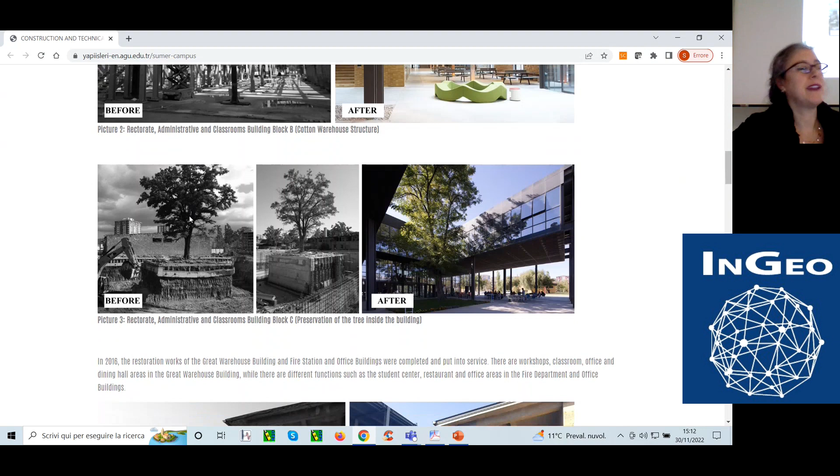Here you can see our building within the main campus. It's a good place, and I would like to share the main building as it was before, and then after renovation we have some places especially for students or for the people who would like to be there. We are preserving some special trees in order to have this structure. And we have also kept some of the previous warehouses, and we now have classroom buildings inside, the offices, etc.

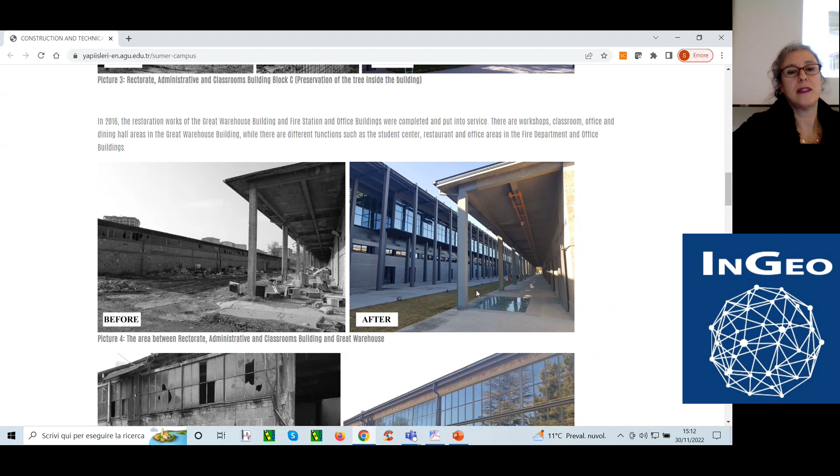And here you can see the renovated part of the facades. Before and after, now we are reusing, and there's a sustainable version of our campus, with some office buildings renovated in that region, and we are still using this as an office, for instance. And we have newly constructed some buildings like fitness centers and some laboratory buildings. And as you can see, nowadays we are dealing with this factory. This is the main factory building, and now they are covering the columns with some geotextile material in order to reinforce the structure.

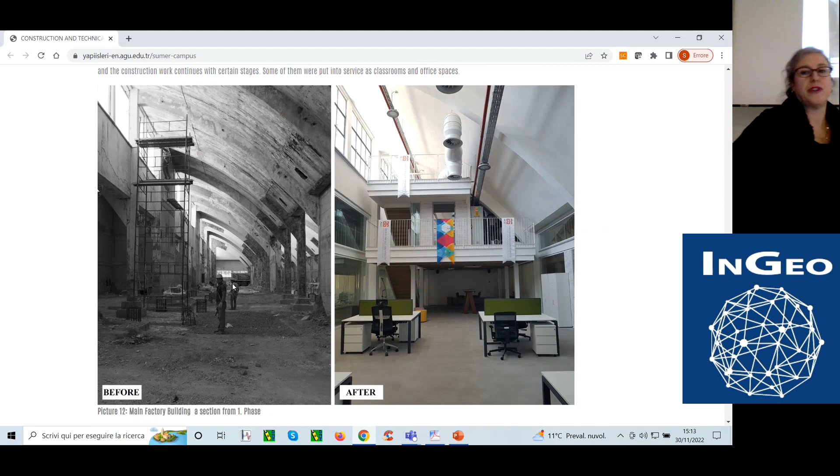Maybe we should say that. So after giving this information, I have to return to my presentation. Hopefully I can reach my page.

So with the numbers, in general, we have a limited number, which is called kind of a boutique university. I don't know how many staff or faculty members you have, but it's a very limited one. And we have 20 programs with 5 faculties, including 100% English taught courses. And you can see different nationalities. We even have some from Italy on our campus. And here you can see our departments, the departments that we have so far. We are not planning to open any medicine or medical faculties. Depending on the technical issue, we are all focusing on that.

In our civil engineering department, we have limited staff, and we don't have a master program. We have a different master program, Sustainable Urban Infrastructure Engineering, which combines urban planners and other disciplines in order to have a program. There are some similar examples in the UK. And here you can see the other programs that we have.

So this is the short video of our campus, and there are additional ones. Probably they will continue, but okay.

Afterwards, I would like to give information again related to our department before we start our case. I don't know if I need to share or do something.

In our campus, as I've told you, we are 100% English education. For our civil engineering program, we have a 3.5-year program. After 1 semester, they have workplace experience, going to the firm and having their internship at that stage. I don't know how it works in your departments, but it's a different stage because interns can get a job after finishing their internship. So that's a good opportunity for them.

What else do we have? We are actually considering applied education. We are focusing on 'you should play and learn.' How can you do that? By making some models or having special apparatus in order for you to make your models. We are really considering that.

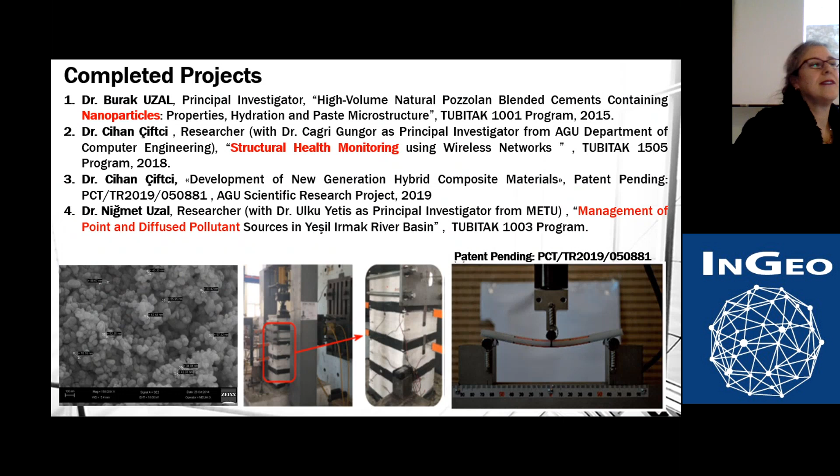Here you can see some examples of completed projects, but I forgot to update some of it. For structural health monitoring or material science, you can find different options and projects that we have already completed. I was also involved in a project related to the economic effects of natural hazards, with the Disaster and Emergency Management Authority. I completed that, but it's another area that maybe we should also discuss.

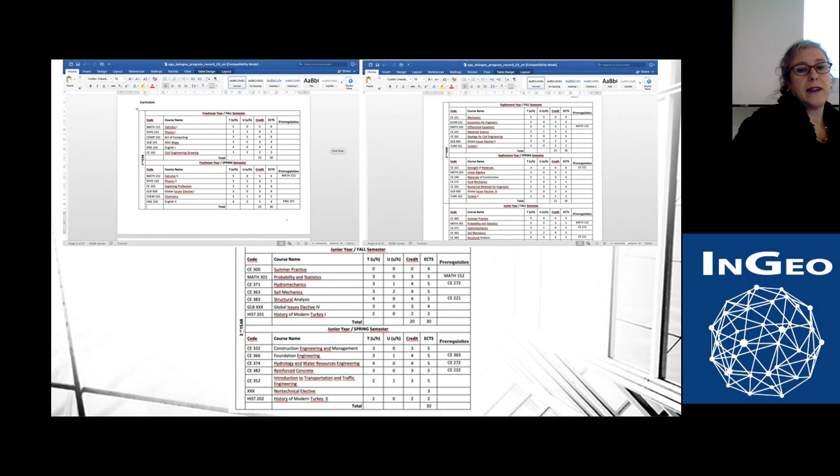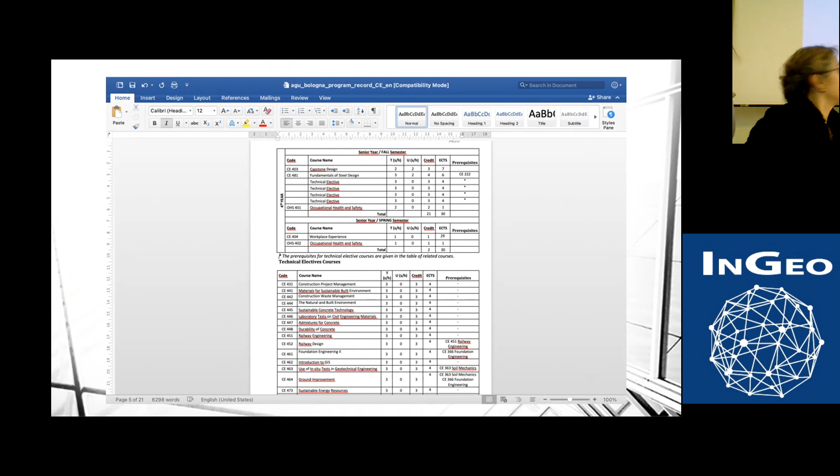For our case, we have some undergrad courses. If you are interested, I can give more details. There are some options, especially for the technical courses. For the Sustainable Urban Infrastructure program, I can give brief information again after the presentation. Thank you for listening to me about our university and our department.

So if you wish, if you are ready, we can start with the liquefaction part.

I don't know if it will work or if they can see the presentation. I don't know what happened with the connection to the screen. So the third one, I can close this. Okay, I now hope it's working. Really, if you want me to put it again... Okay, so now I have the laser. Yeah, you have the laser.

I would like to give brief information about liquefaction. You have already learned and been taught about liquefaction, but during this presentation, I'd like to make you aware of exactly what we've done so far, and what we should do. Maybe we can focus on that, or you will have some questions. At the end, I have some ideas because we can find some projects or things to establish during that period, since many things were actually performed during that stage.

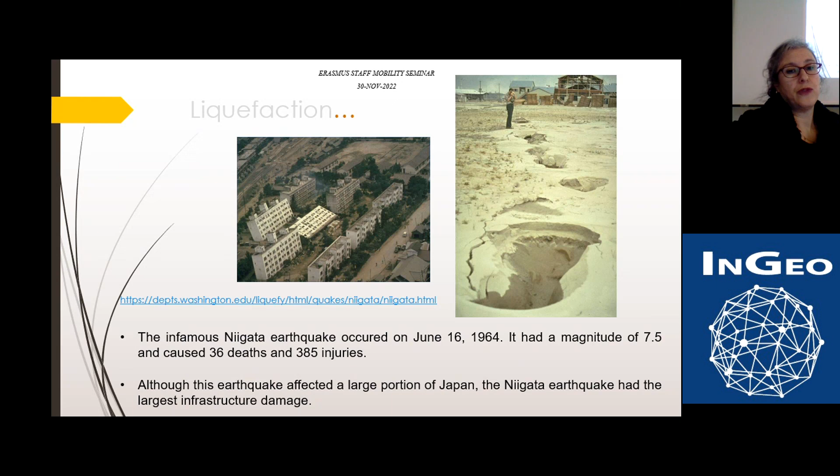In general, I have tried to find a definition for liquefaction. It's really hard to find, but I have taken this directly from a web page, including what happens if it behaves like a liquid. We are all learning like that.

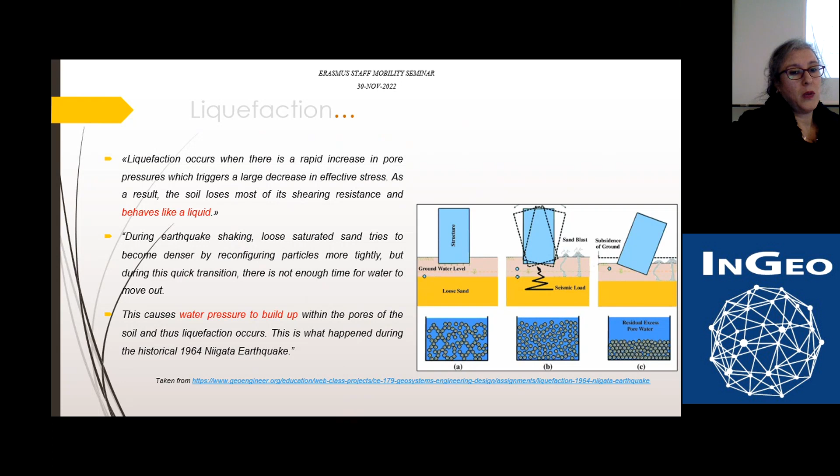So you can have earthquake shaking within loose material, and then, within the reconfiguration of the particles, there will be a quick behavior we have to also consider. Do you have enough time to move the water from the system? We don't actually know, even though we have some observations.

So what is liquefaction, or when does it occur? Depending again on the earthquake shaking, it can cause the pore pressure level to change. You'll be having increments, especially.

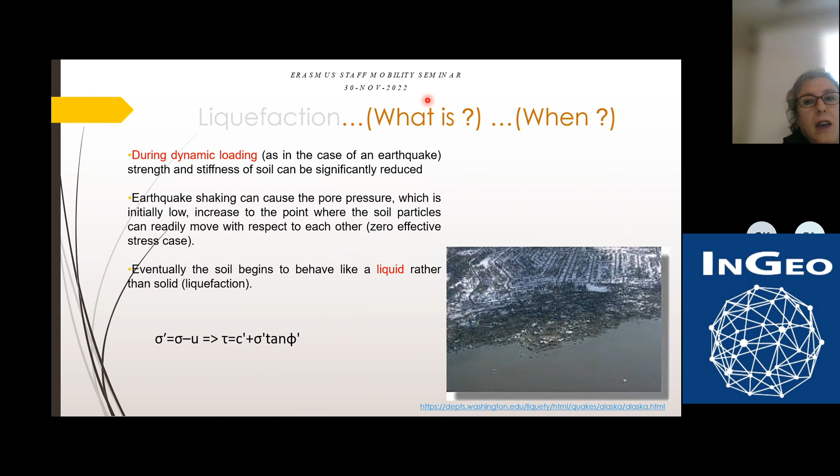As we all know, eventually the soil begins to behave like a liquid rather than a solid. This is the behavior we are having. So where exactly it occurs depends especially on the shaking activity.

You can have blasting instead of an earthquake event. There would be some increment in water pressure from construction-related activities like blasting, which can increase the water pressure in that sense. Kramer also mentioned that if you have a saturated sandy layer under loose soil conditions, you can have liquefaction with a magnitude greater than 5.0. This is another thing we need to consider.

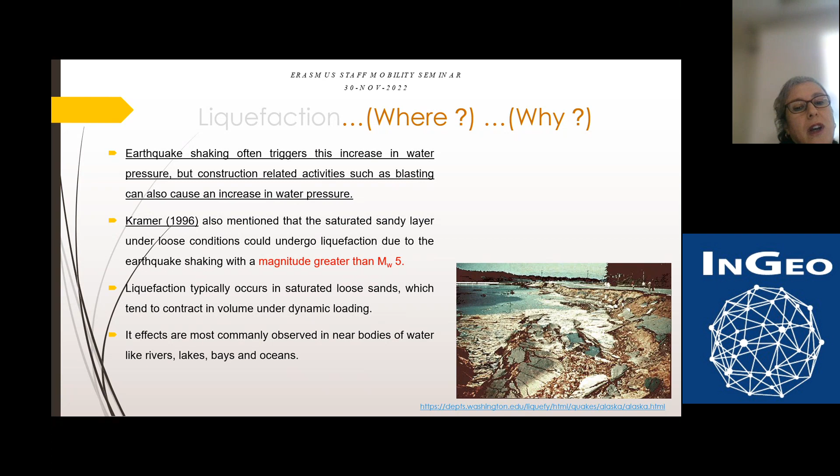It typically occurs in saturated loose sands under dynamic loading, and it especially affects river areas or lakes and other bodies close to water regions. How it occurs depends on the structure - if loosely packed, it moves toward a denser configuration.

One of our professors was saying that for materials like concrete or steel, there are some standards you can apply. But for soil, this is impossible because it gets very complicated, and it is case-study based events that you have to deal with.

During an earthquake, what happens is there isn't enough time for water in the pores of the soil to be squeezed out, and some gets trapped, preventing the soil particles from moving closer together. This means there's an increment in water pressure in the system, leading to softening and weakening of the soil deposit behavior.

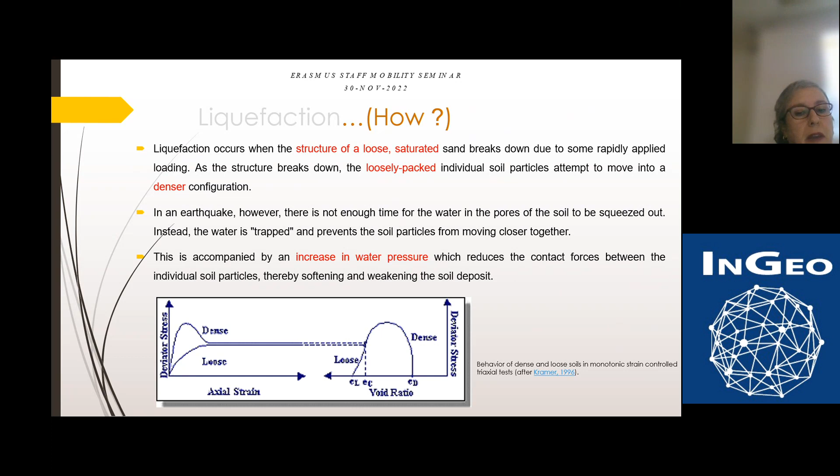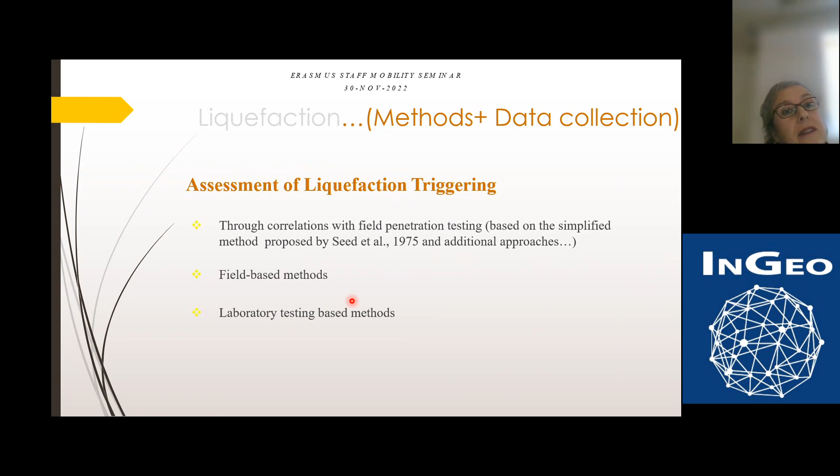Afterwards, what methods do we use or how do we collect data for the assessment of liquefaction triggering? There are lots of publications you can find depending on field penetration testing, other field-based methods, or even laboratory testing methods. I'm going to give some examples and try to emphasize the importance of liquefaction.

Here you can see the typical approach we use, some empirical analysis. You can have a liquefiable layer, and borehole logs with SPT, standard penetration test application, or you can have CPT. As far as I can tell from Professor Amoroso, there are new techniques being used in Italy. But in general, the basic trend, and the economical one, is using SPT all the time.

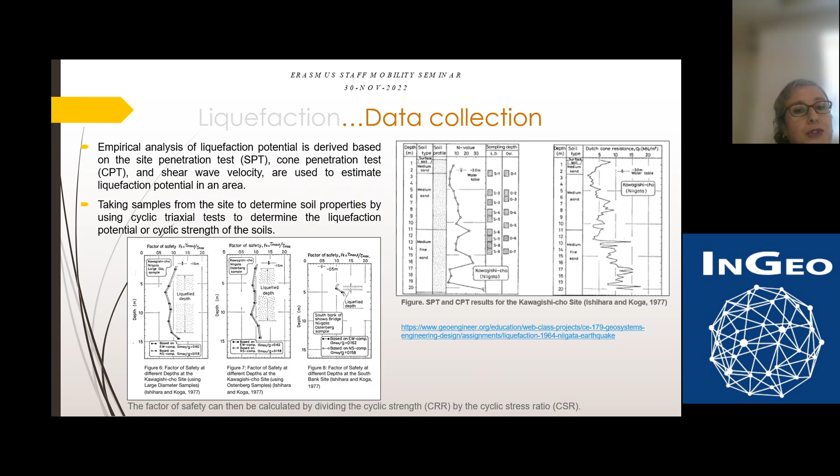I don't know if you are also allowing all the companies to apply SPT at this stage. But there are lots of correlations, and you need to also consider different items that I'm going to show you. So this is the main approach for us.

What else do we have? Within field penetration testing, we need to look for the factor of safety. We have cyclic resistance ratio and cyclic stress ratio, as you know. We obtain them with different parameters and factors in order to reduce, increase, or change the level for all the soils so far. At the beginning, we started with SPT or other tests for the cyclic resistance ratio. The cyclic stress ratio represents the liquefaction demand imposed by the earthquake.

When we correct and get the factor of safety result, it depends on the magnitude scaling factor, or you may have additional corrections needed for fine content. There was a Chinese criteria, as you all remember, but it is useless right now. So there are lots of updates depending on fine content.

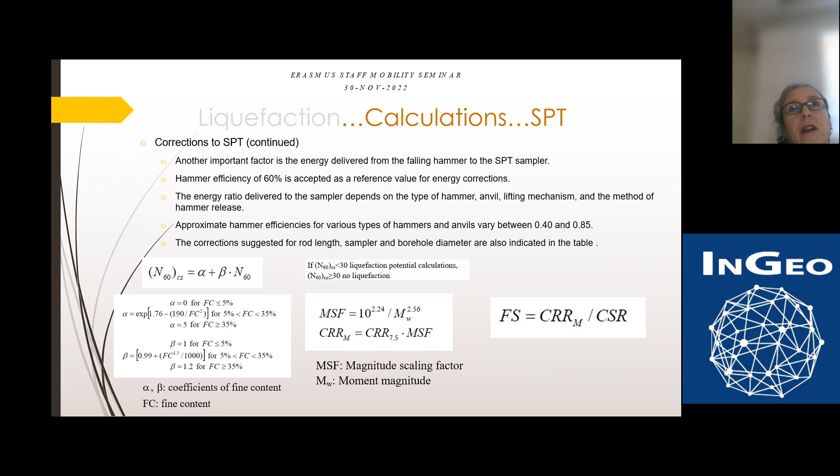As far as I heard from Çetin and Bilge just recently, they're assuming that the correlation we have, for instance for CRR, should be updated. We consider taking that correlation and applying the correction. They're also thinking about the energy ratio of the SPT.

So there are some unknowns, and we still need to find the corrections or applications for the formula. Because in Italy, what percentage of energy ratio are you using for SPT? Is it 60?

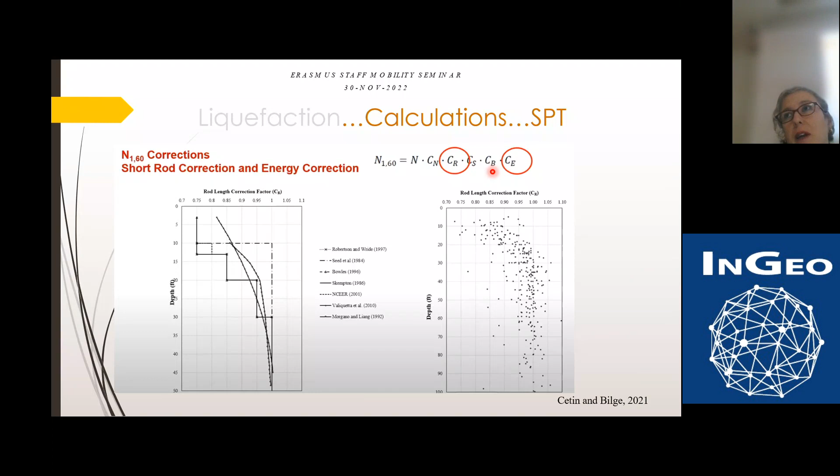You check at the beginning when you buy the machine, but then it's always the same number, and probably it should be checked. There are apparatus in order to measure the energy correction, so it's necessary to apply that instead of just assuming the value.

So for SPT, again, you can find many correction factors related to fine content. There are applicable ranges with different procedures and empirical formulas. And it continues, because we have an overburden correction factor, and you can even add a sloping ground correction factor. If it's a sloping area, you have to consider an additional correction.

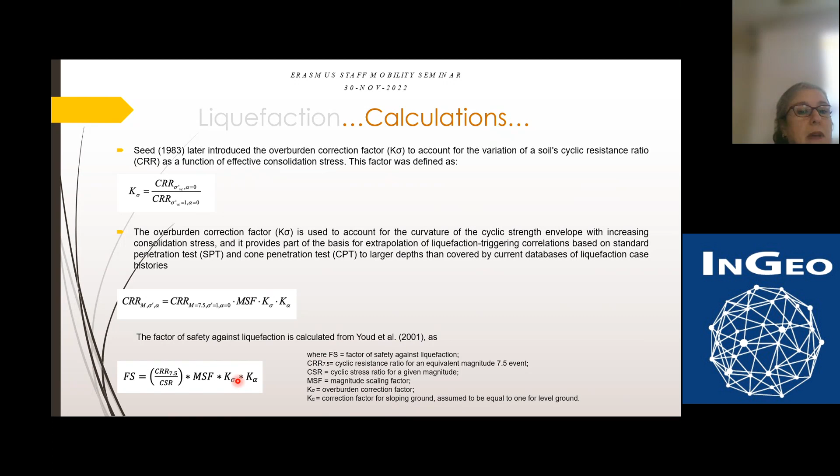It looks like things get complicated with SPT-based or even CPT-based approaches. I recently looked at a CPT study you're all familiar with, cone penetration testing. They performed it within a critical layer related to gravelly soils. So this brings to mind that with gravelly soils, you're dealing with CPT applications in order to get the liquefaction analysis, etc.

It's a kind of approach from New Zealand. And I have also come across DPT for the Ecuador, I don't know how familiar you are with it. It is called the Chinese Dynamic Penetration Test. They have also compared it, again, in gravelly soil in order to get some results for the liquefiable layer for the critical area. So there are still ongoing projects and maybe new updates for the applications.

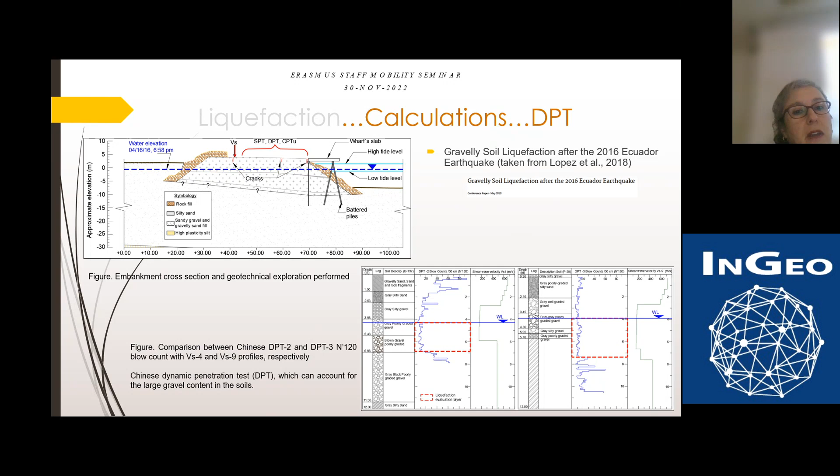And when we come to the shear wave velocity approach, there is especially the famous one, Andrus and Stokoe, that we are using a lot. But there are some, again, gaps or some new updates that I have to mention, and I'm going to show some figures and some recent references. And with the SPT data, you can have it from different areas. When you look at the different states and different years, we are actually having more data. That means that you can be on the safe side and you can be sure in order to study.

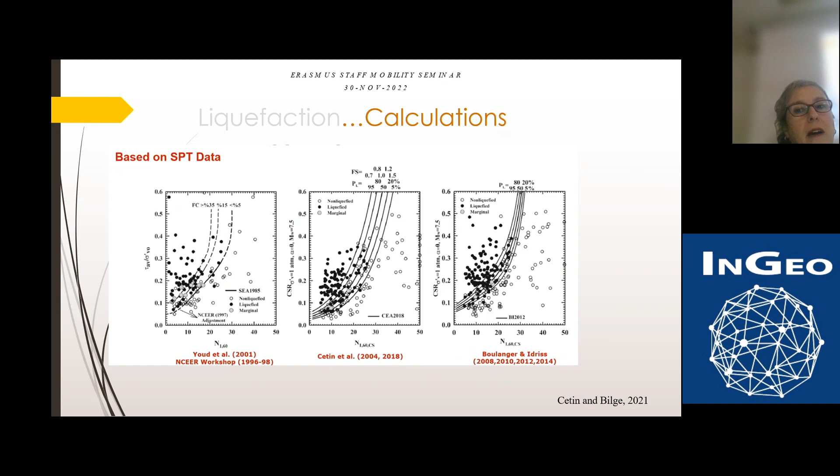But how about CPT, for instance? Again, it is valid. You can have a different approach with Idriss and Boulanger, for instance. They are increasing the database again, and then having different curves in order to be sure which would be the liquefied and non-liquefied sites. But somehow there are some researchers who could not update themselves or could not use the recent version of the methodologies. Maybe they are losing themselves inside the research or other things. So this is another critical issue. We need to clarify all of the items.

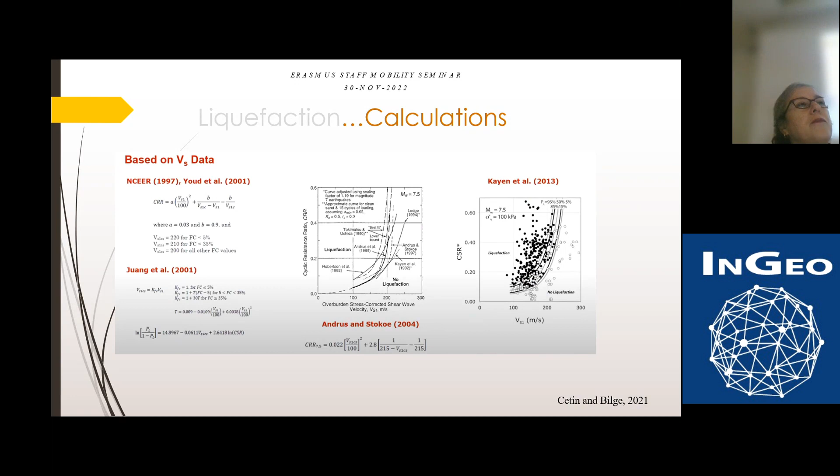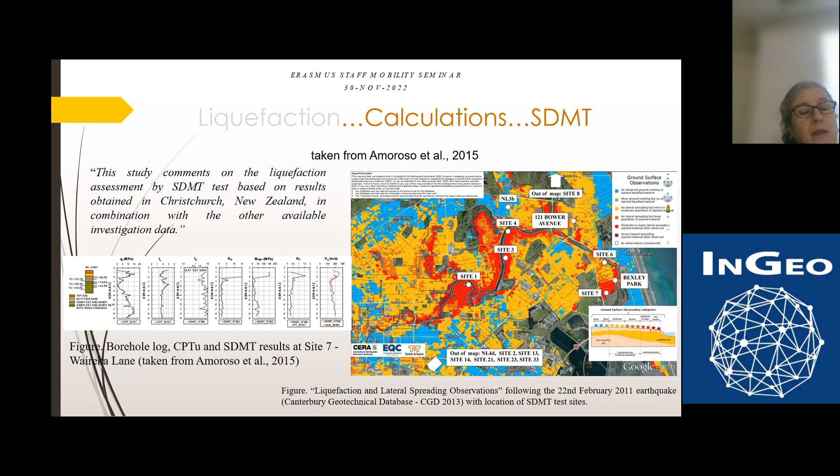And for the VS calculations, as I mentioned, we have Andrus and Stokoe, it's very famous, and there's a new study with Kayen, which is also related to the shear wave velocity, depending on the different cases. So if you have the data, you can even try, or you can compare with SPT, VS, or CPT, etc. But when I arrived, we talked a lot with Professor Amoroso about SDMT; there are still works ongoing at that stage, and it is really worthy to work on it. There will also be some comparison between the CPT and SDMT, and she showed me and shared with me some of the important items. This is also an important and critical thing for the liquefaction behavior and for obtaining and updating the cases, I should say. These are the calculations part, but how about databases?

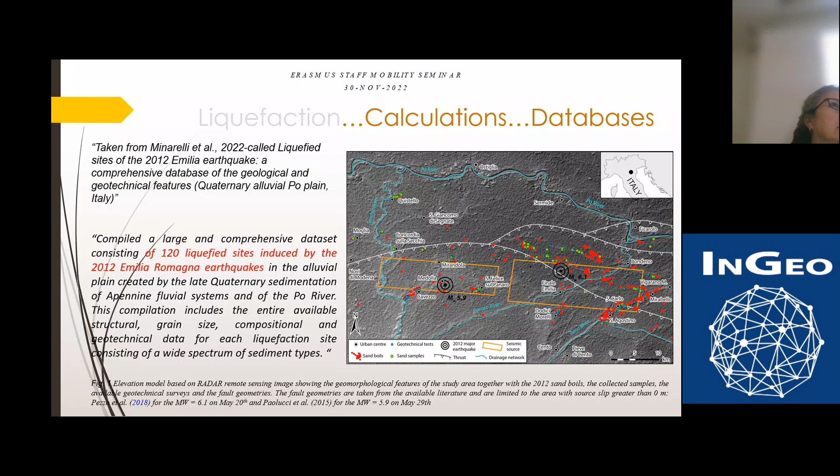For instance, I would like to share a database from Italy. They have 120 cases, or even some special cases that they are collecting as sand boils or lateral spreading or liquefaction behavior. But when we think about the worldwide stage, that means that you also need to criticize the effect of the database that we have. Nowadays, maybe you heard about the next generation attenuation models; there's also a new generation of databases, the next generation liquefaction database. I have searched a lot, but there is still some missing data that you need to update for all over the world. And in some sense, the data expansion depends on the quality of the data. Another issue that you need to consider.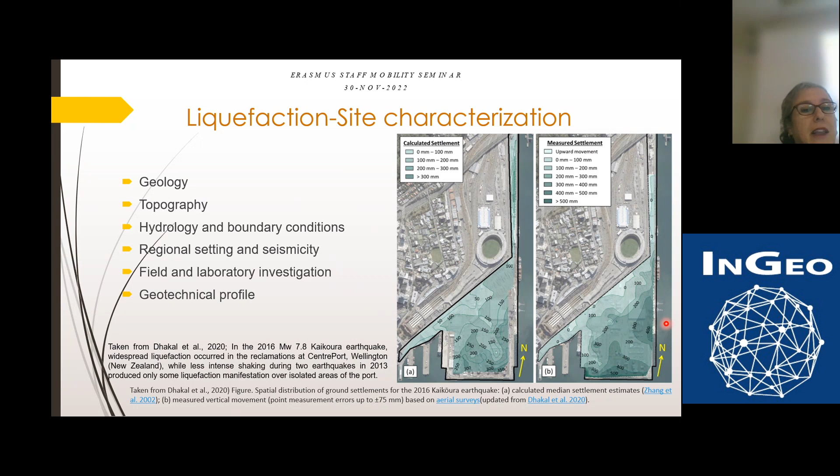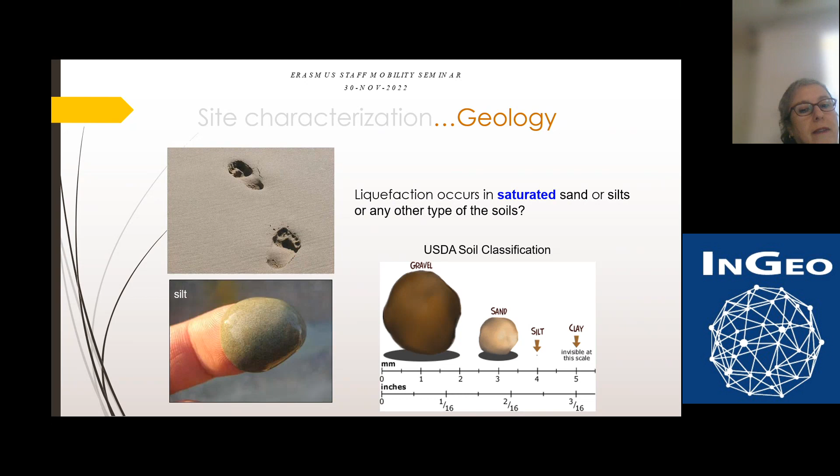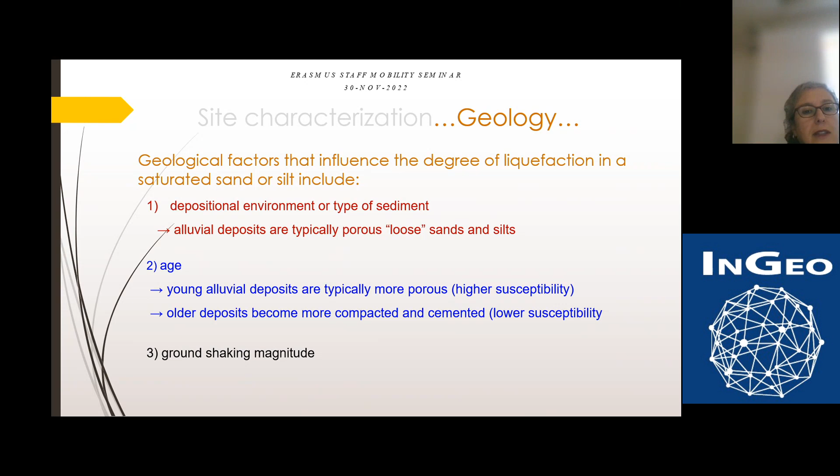So what else for the geology? When we return to our case, we all know about sand or some silt, but how about clay material or gravelly material? There are still some unknowns, and there are still works ongoing at that stage. With the factors, we also need to consider the depositional environment, or even age, or the magnitude. So we have to divide, or maybe we have to look for some special parameters in order to connect the database. So here you can see the effect of the geology, related to the behavior that may occur after liquefaction, or even in these areas.

Or you can see the structural behavior, but the foundation, because of the liquefaction, may cause the problem for your case. So for the geology, especially geological structures and faults, type of the sediment, we have to also go deep inside the area, because age of sediments would be also critical for us. I don't know how the scale effect would be effective. We need to have a local scale, or we need to make it bigger. So we have to be sure again.

And of course, degree of consolidation, depending on the clay material you have, or past stress history, how we can measure or how we can understand that. So we need to have some geotechnical profile or site investigation models in general, and of course 3D ones right now. So as you can see, some alluvial material here you can have. And what else?

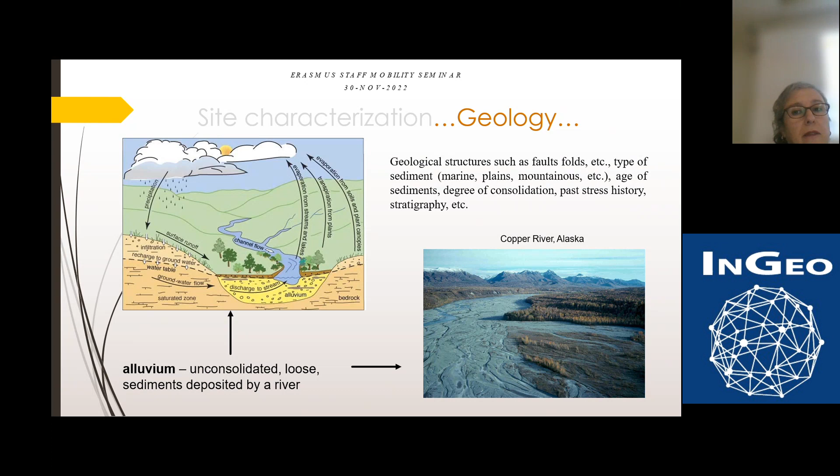Amplification. So do we need to consider both amplification and liquefaction at the same time? Yeah, maybe. But we should also work and think about it, because it's also related with the topographic activity. We should also consider that. I would like to emphasize.

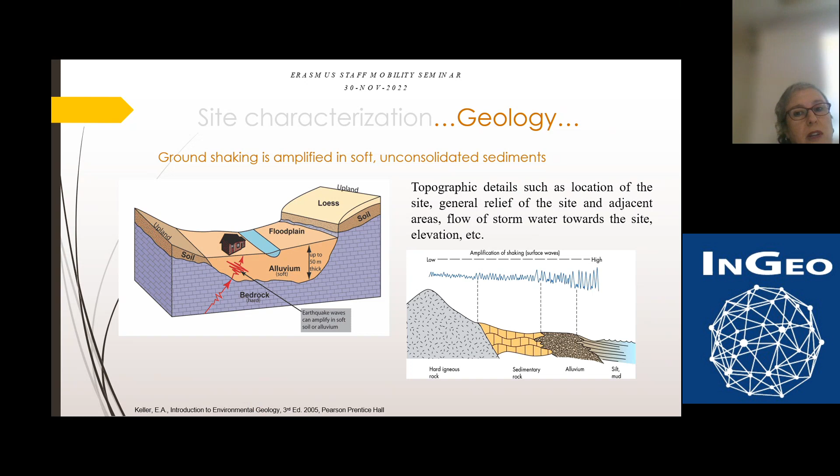Besides, there are some hydrological conditions. So how we can measure the depth of the groundwater table, or how can we be sure that the depth is the exact depth for our analysis? We are assuming some kind of behavior that occurs in the actual soil type. So it depends on the rains or drainage pattern, etc. So you need to have a whole model, including maybe an interdisciplinary approach.

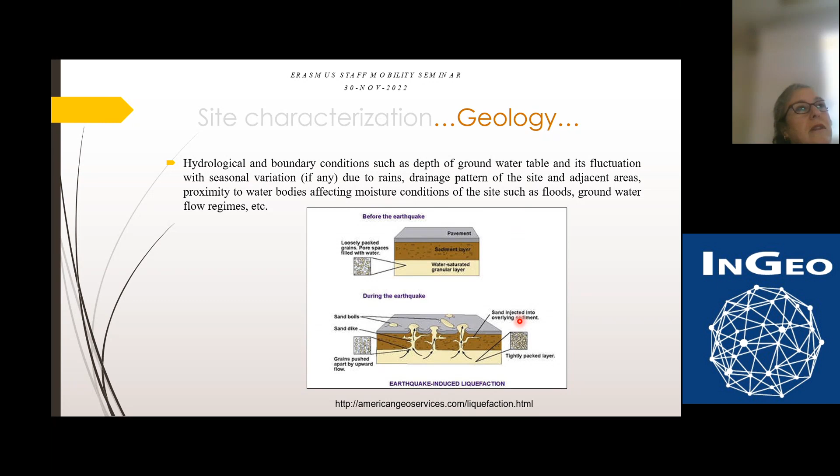And when we consider the effect, especially in the moisture conditions, like flooding or groundwater flow regime, you will be facing maybe liquefaction behavior that may occur frequently. I have a study that I would like to emphasize that occurred in Washington State with a very low seismic activity, but there is lots of liquefaction behavior observed within this range. So we have to consider again the magnitude, or which magnitude levels we can have, which amount of accumulation or liquefaction we can have.

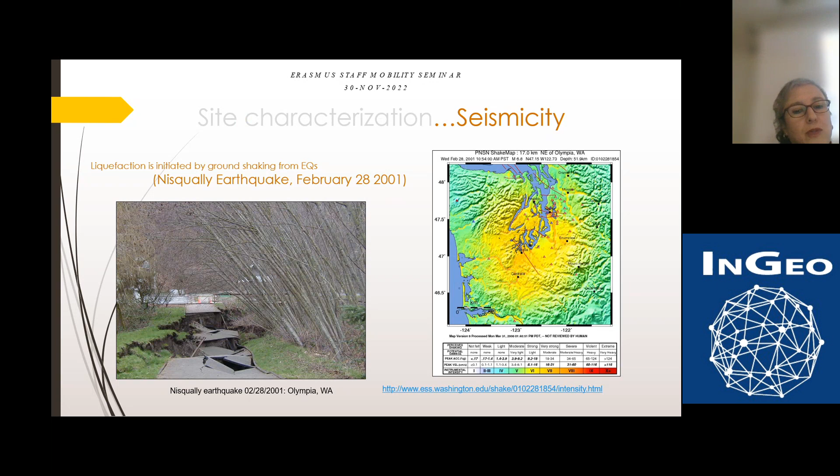Another point that I have to give information on. So for the seismicity, again, we have some potential. It's a nice figure, including all of the items, but we need to also deal with the below layers that we are having, how we can be sure that there will be a boundary between the layers, depending on the fault activity or some past earthquake or tsunami history, etc. So a kind of site-specific seismic hazard analysis should be done for the relation of the parameters and the performance. Sorry. I hope I don't bore you, but yeah, it's a long topic.

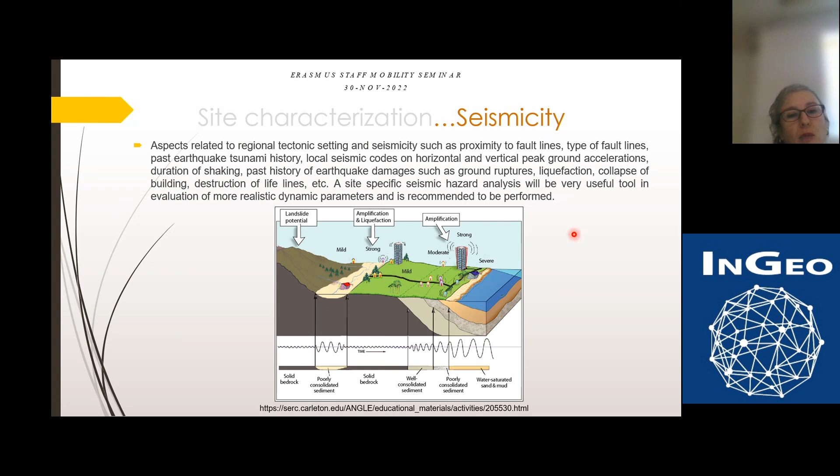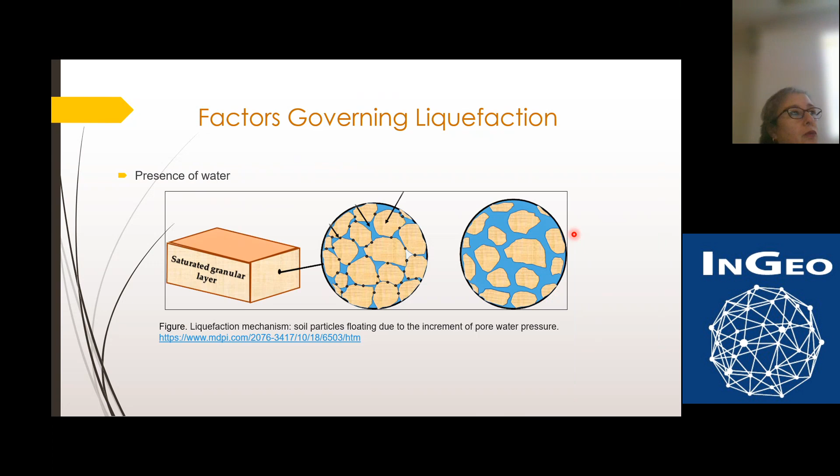So if we find the parameters, I can add additional ones like the factors. Can I add, instead of magnitude, intensity or duration of the earthquake? Yeah, there might be possibilities. So it also affects the liquefaction behavior. Again, it's related with the groundwater, and the other things are also similar. But besides, we should also have the in situ confining pressure around the material. These are what we should consider, especially intensity and duration. We have to make somehow correlations between them, maybe. Or like the presence of water that I am repeating. So how can we do that?

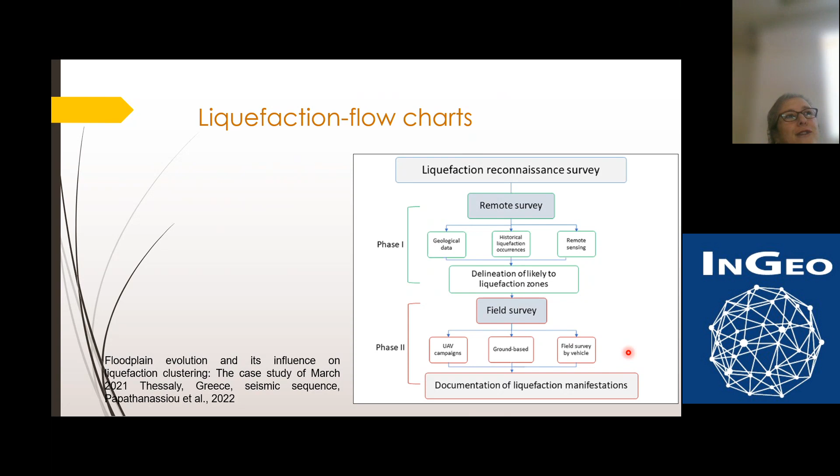I searched some of the approaches. There are some flow charts. You can take one of them, for instance. It's a very recent one. And they have two phases. They have the data they are collecting with the survey, then a field survey, and then some findings for liquefaction manifestations in the area. It's really hard to know how we can behave for a flow chart, or do we need to have our own for each country or for each area? We should be sure. And what else?

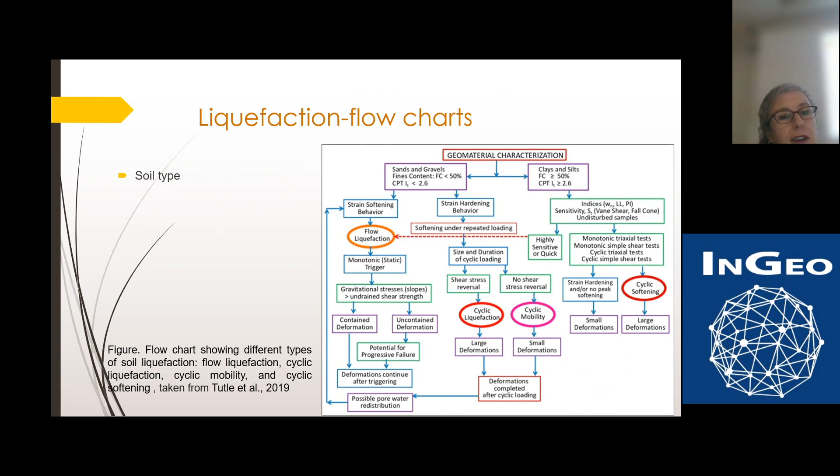So until that stage, I have tried to figure out and then give some questions or just brainstorming for the liquefaction part. If you are not getting bored, I'm going to continue with the post-liquefaction part. Or if you don't have any questions.

No, it is fine. Sorry, my voice is maybe sometimes unstable because of talking. Yeah.

Yeah, actually, I heard from their approach, especially depending on the methodology that they are working on probably. Okay. Yeah. So we need to be updated all the time, and then it's really hard while you are doing your work. Big change. Big change. Yeah. So important, especially for the rod length also. It's also critical.

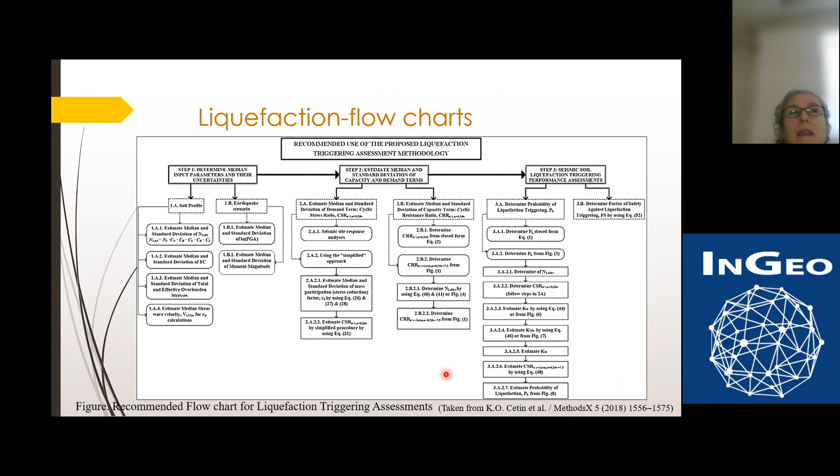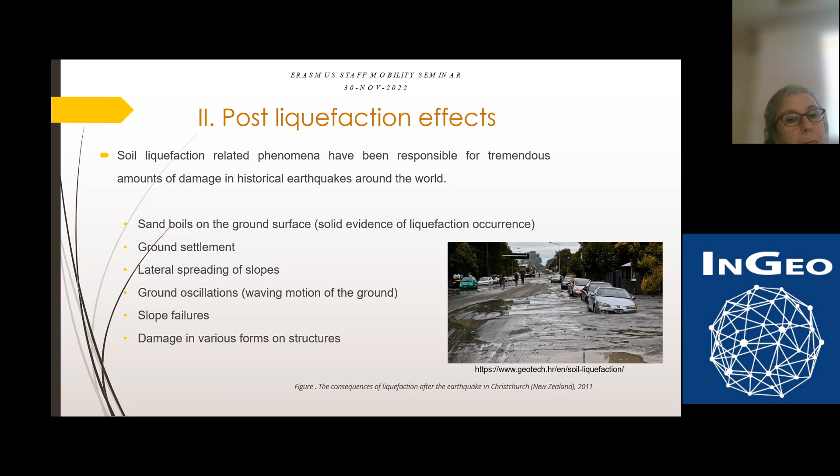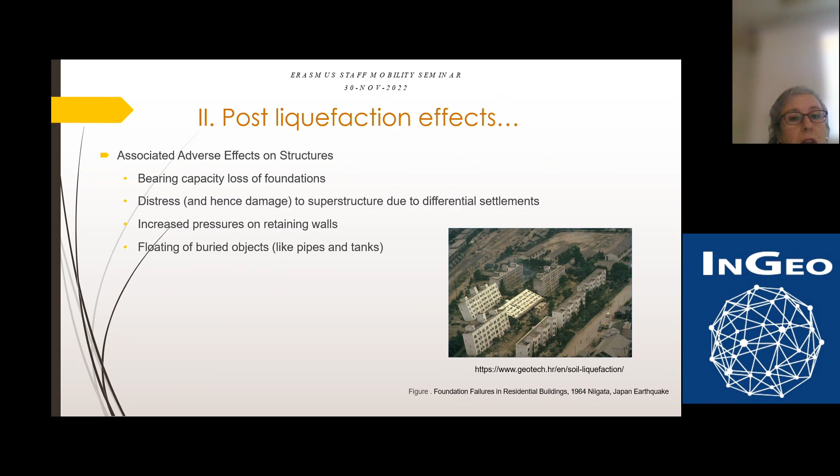So besides that, we can have some effects on the structures, like the bearing capacity loss, or some differential settlements, or some increments in the pressure of the retaining walls, or some buried objects floating, especially the pipelines, maybe the main problem that we can have because of the liquefaction failure. And I would like to share these foundation failures.

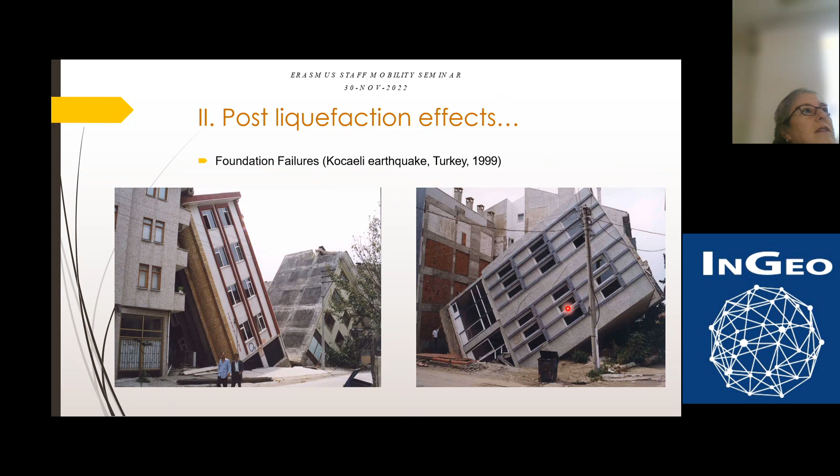They're all really famous after the 1999 Kocaeli earthquake, as you can see. The structures seem okay at that stage, but the liquefaction behavior, or even in here, as you can see, with a settlement of 35 centimeters or maybe more than that, they have had this problem. 1999 earthquake, as you can see. So these are the foundation failures.

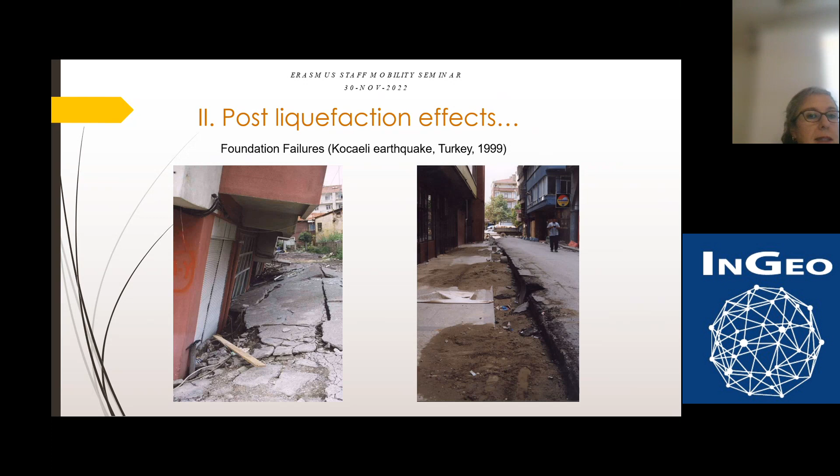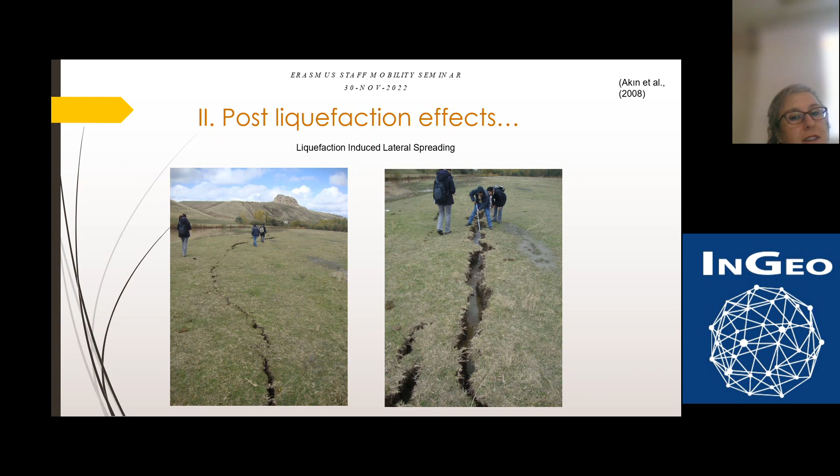There is some lateral spreading that you can observe, especially near the river, and then you need to also measure, and you need to go after the earthquake in order to get the data. But it's another thing that we need to consider.

Additionally, sand boilings. What would be the amount of the sand boilings, or what would be the radius, or the material that comes out? Also, we should add the cap soil behavior. You can have maybe unknown material that does not allow the material to go up. So we have to also study that.

And with the sand boilings, Christchurch is the typical one, and Professor Amoroso really worked there, as far as I can see, collecting and making lots of experiments. It's a nice laboratory in nature to have an idea, especially of the sand boiling material.

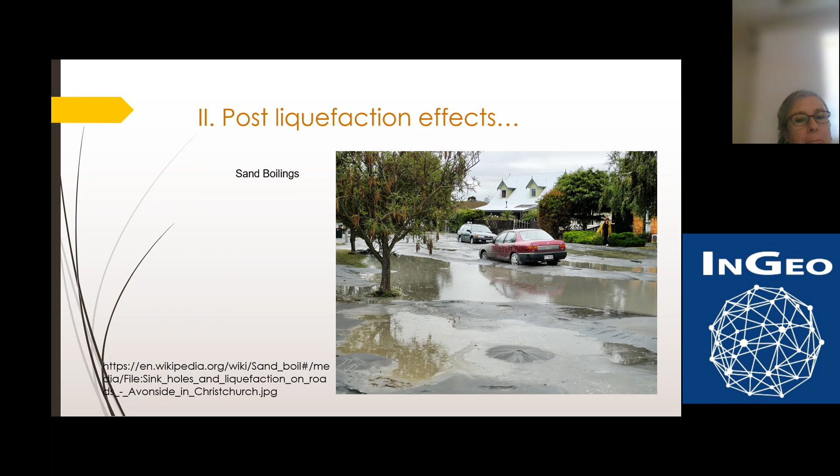Besides, as you can see, with the damage in the various structures, within Kobe or again Christchurch, and even some sinkholes that may occur, the whole amount of the material is related to the liquefaction behavior. Sorry, I couldn't give some of the important items because I have to keep them for tomorrow. Therefore, I need to just give the general idea.

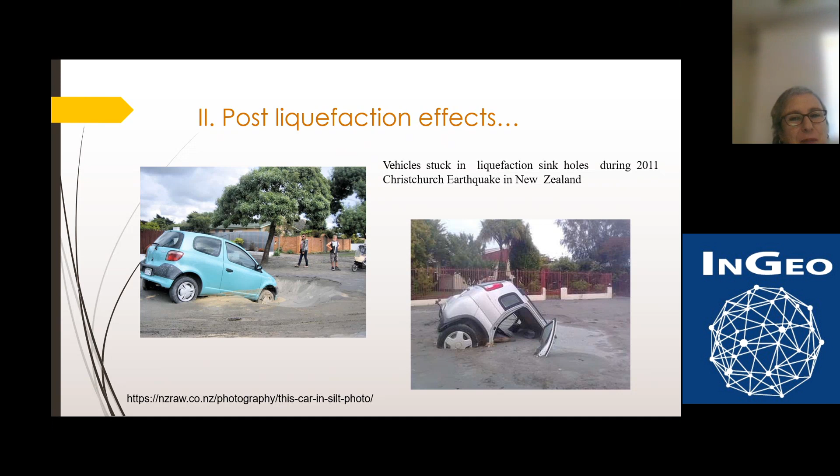While I am putting these examples, I realized that we are theoretically perfect. We can draw everything, but while we are having the experiment or the other things, it really changes. We cannot see the theoretical parts in the field.

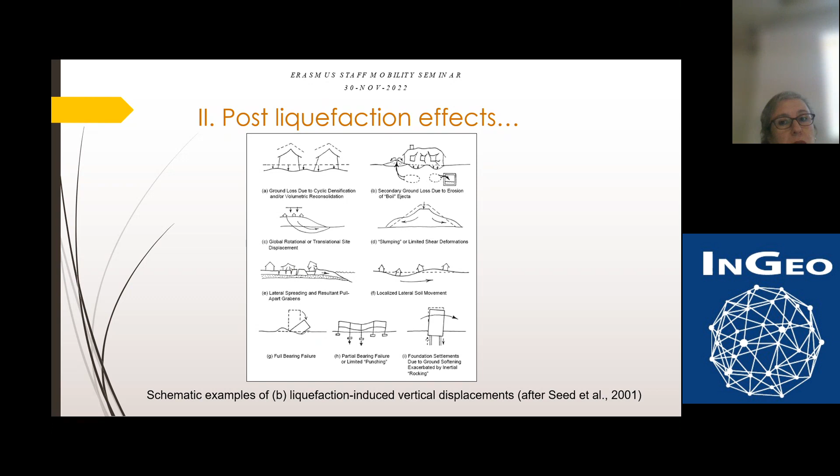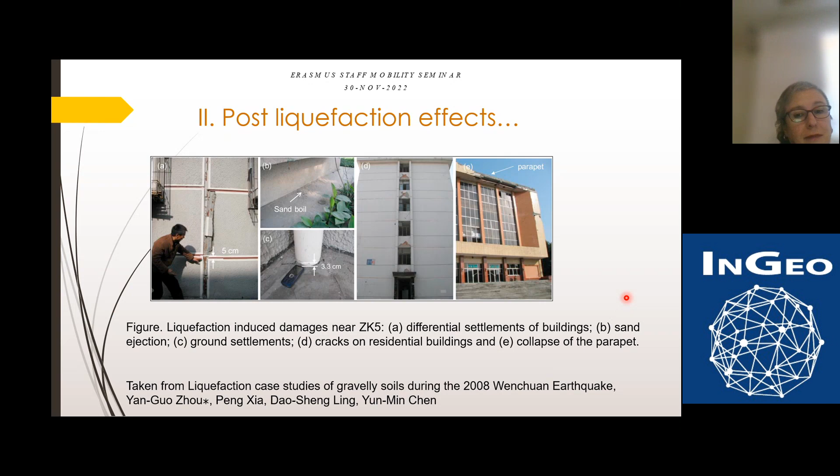And again with differential settlement, it is not catastrophic, but as you can see, there is some adjacent behavior in between the structures. You can observe the settlement or differential behavior that occurs in the structures.

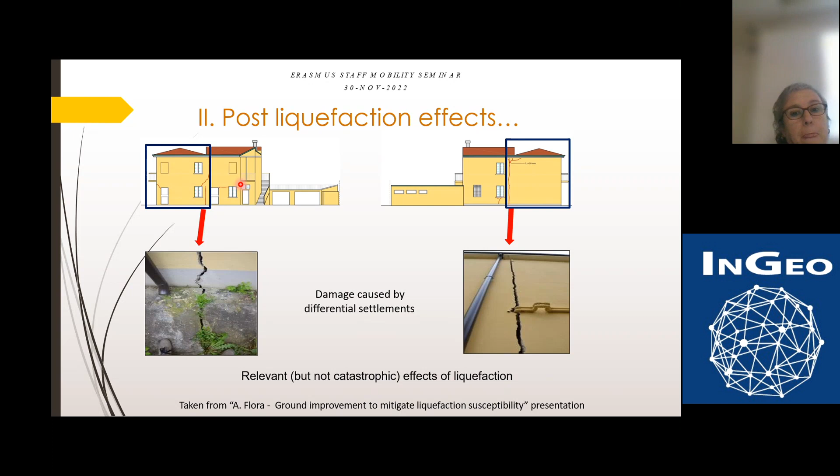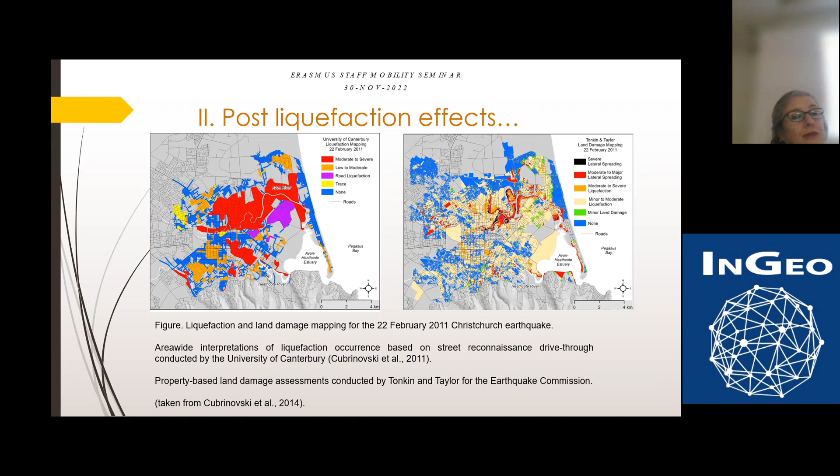What else? I should say, okay, there are some approaches. We are making some maps. So how can we decide the map is necessary, or what the scale of it would be, or we should be sure about the details. Here you can see from Cubrinovski, they have studied some places depending on liquefaction mapping, not the triggering, but you have to also consider the hazard index or the size of the liquefaction potential or severity. So it's another issue that I have to say.

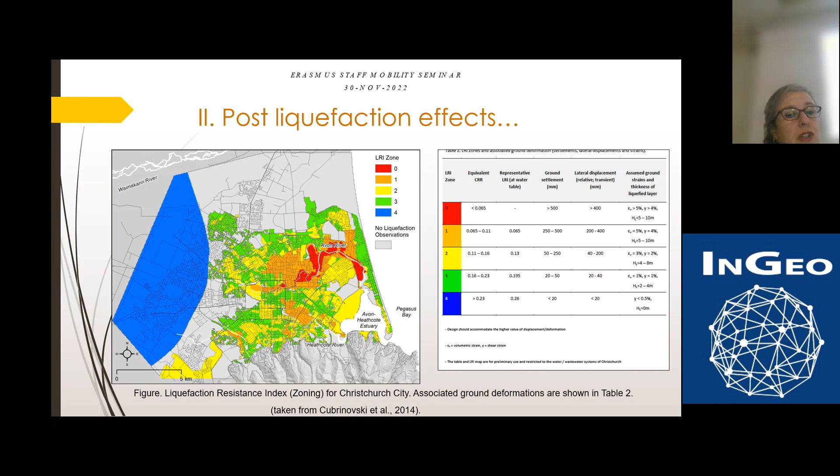It's a good example. So these are the effects that we have seen, but how can we solve it, or what are the methodologies? We have settlements. As you know, we have different approaches: Tokimatsu and Seed, Ishihara and Yoshimine, Shamoto, and additional databases, additional approaches that we are having. I have actually used some of them.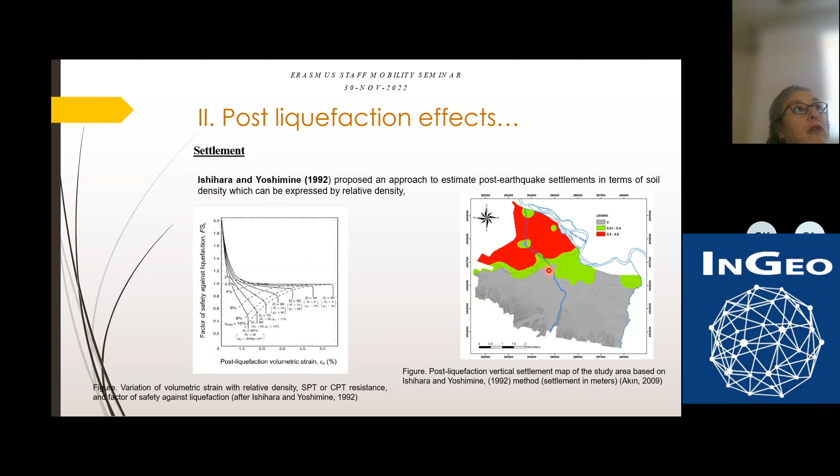By the way, I have studied seismic microzonation for a specific area. Tomorrow I'm going to talk about it a little bit. I have prepared the vertical settlement depending on different formulas. In one of them, here you can see the area, and the amount of settlement that may occur with the liquefaction. Or even with Shamoto, I have used some approach depending on the graphs, and with the other one.

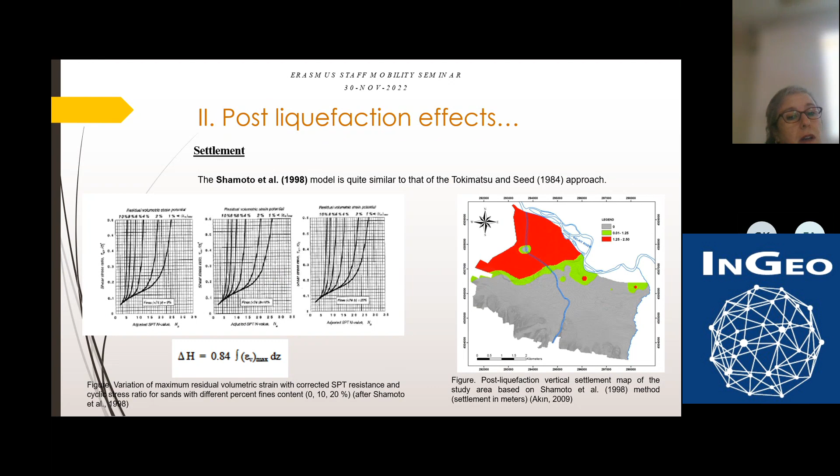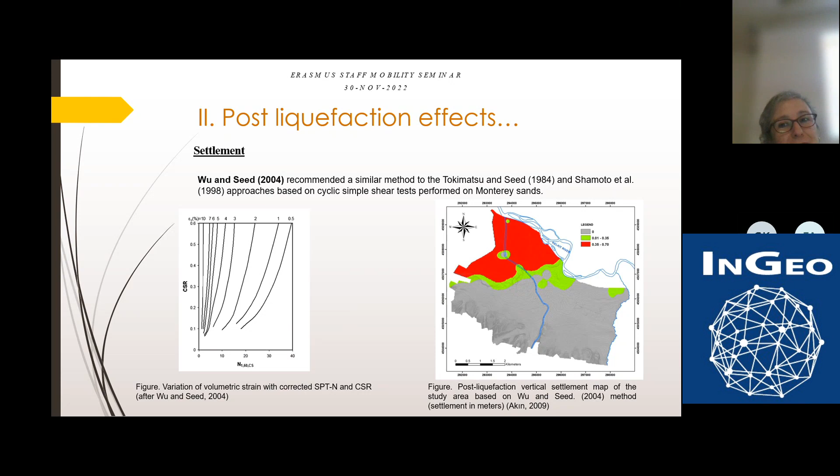And for the lateral spreading, how can we obtain the results, or which formulas should we use? In here, as you can see, some researchers use empirical models that deal with the lateral spreading behavior, and maybe we should somehow add sloping ground or the sloping amount for the lateral spreading, because we have corrections like K-alpha, as you remember, for SPT, but for liquefaction-induced ground deformation, we don't have any sloping behavior taken into consideration, as far as I can understand.

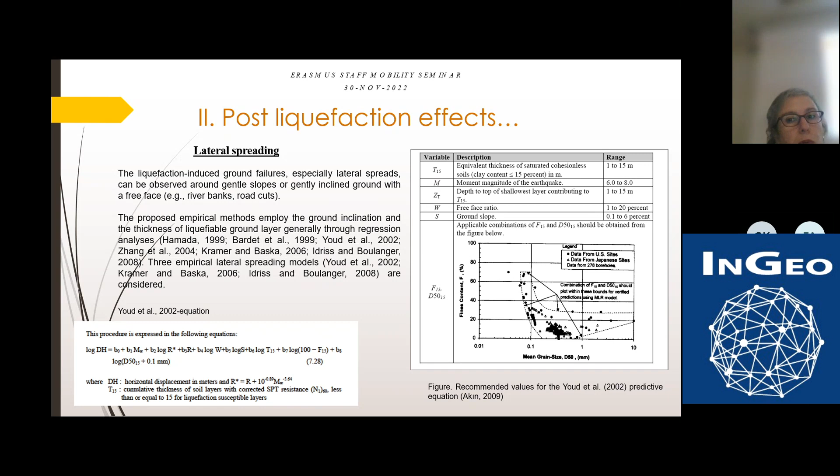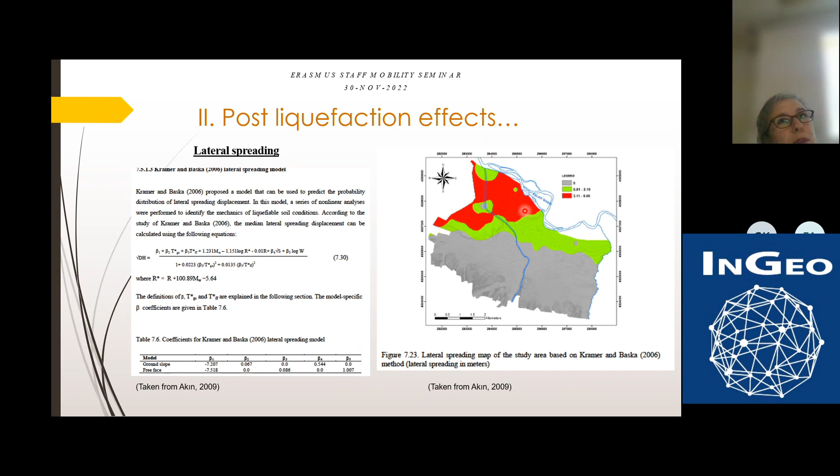And here you can see one of the approaches, and that whole equation I have used. Again, the lateral spreading amount in some of the places next to the river is getting higher and complicated. And the other one is related to the Kramer and Baska approach. Again, you can see the red areas getting higher or bigger. Why? Because of the approach or because of the cases, as you can see. So there would be some comparison, or we need to decide.

And for the other one, Idriss and Boulanger. It looks similar to Professor Kramer's approach actually, and Baska, but why does it differ so much, or what is the reason that we are having different sizes of lateral spreading or even settlement? This is something we need to talk about maybe.

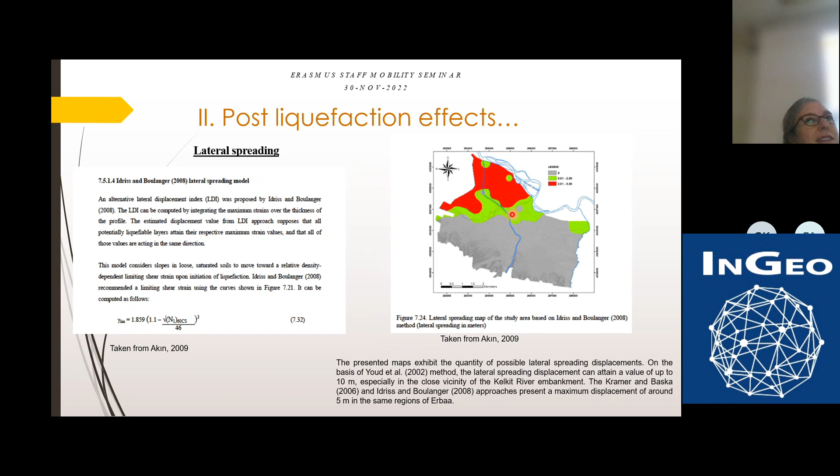And with the post-liquefaction effect, with the ground deformation, it's also necessary to have a zonation map. It's from my area again, and there are some limitations for the Ishihara method, such as the maximum acceleration that you are having in the system. So this is another reason why we are having acceleration values, or why we are using PGA or magnitude, etc.

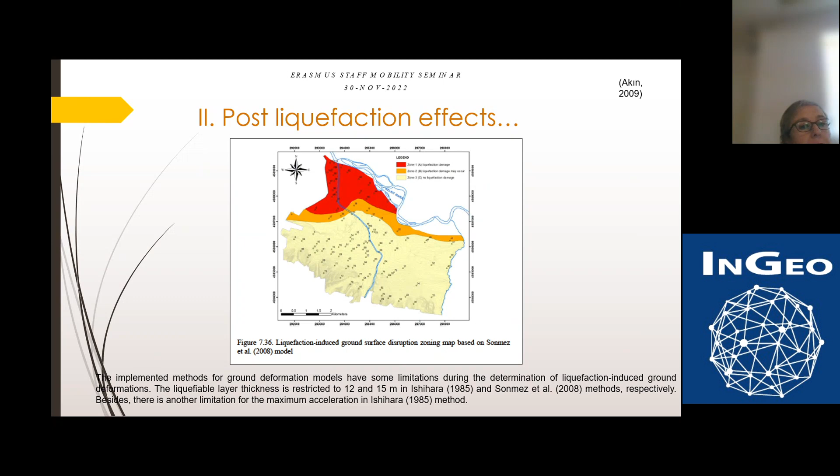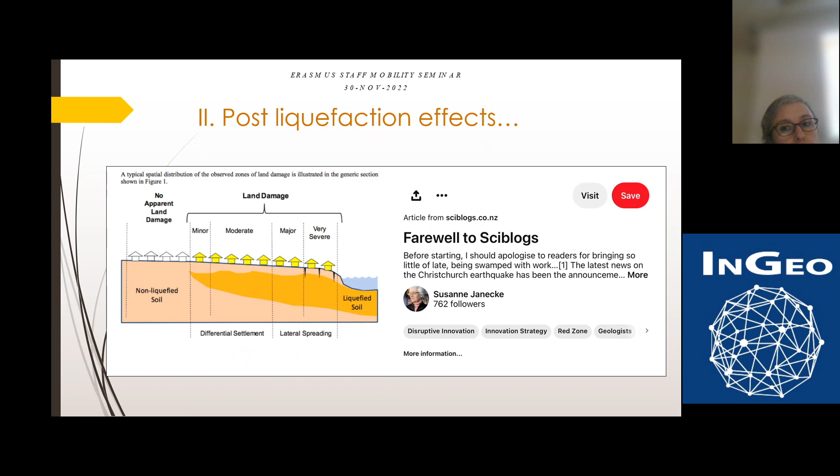When I found this figure from Pinterest, I asked Professor Amoroso: it's very nice to have some boundaries between them, but how can we decide in the liquefied soil? Okay, you have the lateral spreading. It seems to us very severe or major, but it continues with the land damage with the differential settlement. So maybe we should study both, or at the same time give similar results between them. I don't know.

So when I was working with the other approaches for lateral spreading, I realized that Çetin and Bilge divided them into empirical correlations, integration of the laboratory work that they or other researchers have, sliding block analysis, or even computational mechanics based on the application of 2D or 3D numerical models. So in which sense, in which area, or at which level should we apply these techniques?

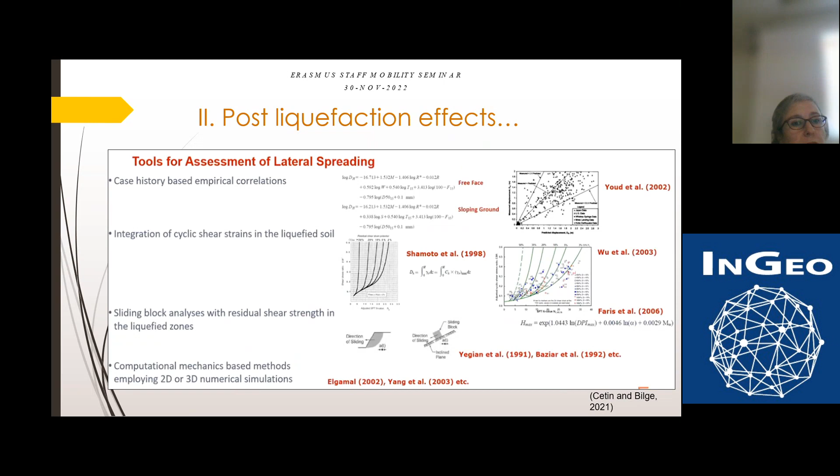And what else? We are actually using some software. I don't know which one is famous in Italy. We have RocScience programs, generally Settle or Slide, etc. Or GEO5, I heard, or even Plaxis. We are using them a lot for modeling in order to get the deformation and the behavior of the soil material. So we have to be careful about their usage.

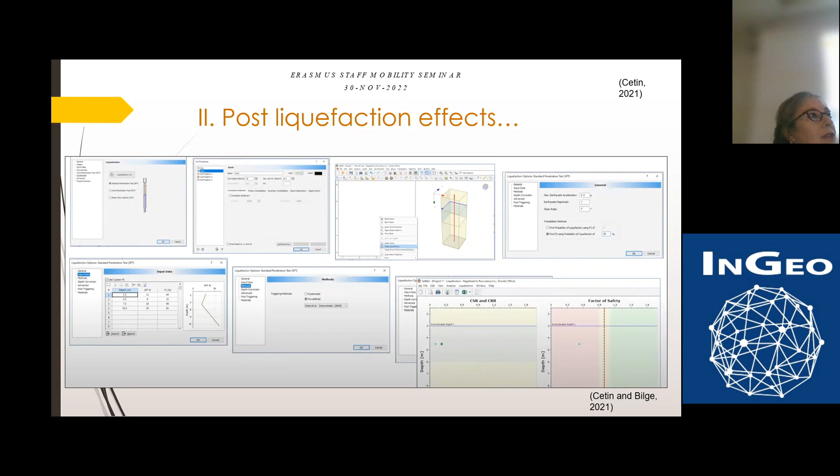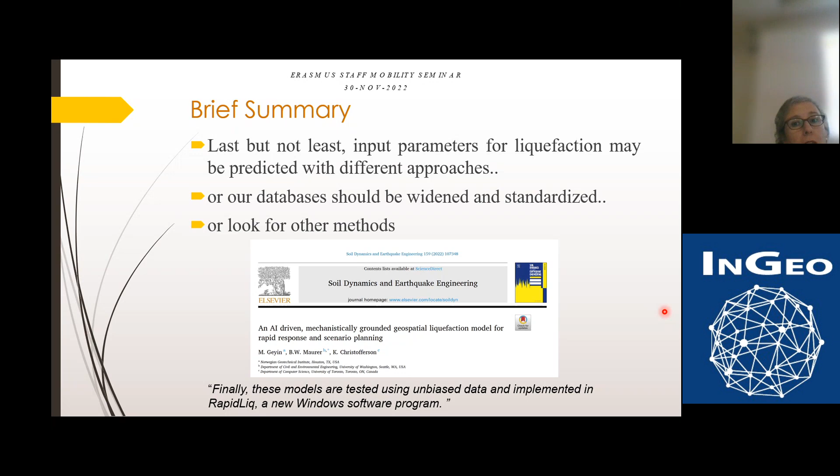I tried to make it brief, but I would also like to mention ground improvement techniques. Maybe tomorrow I can add some slides. It's also necessary, before and after application of ground improvements, to know how we can measure them, or whether we need to follow the liquefaction behavior before and after. In my opinion, in this sense, I would like to give the information and make you aware of the important points. So I would welcome your comments and suggestions.